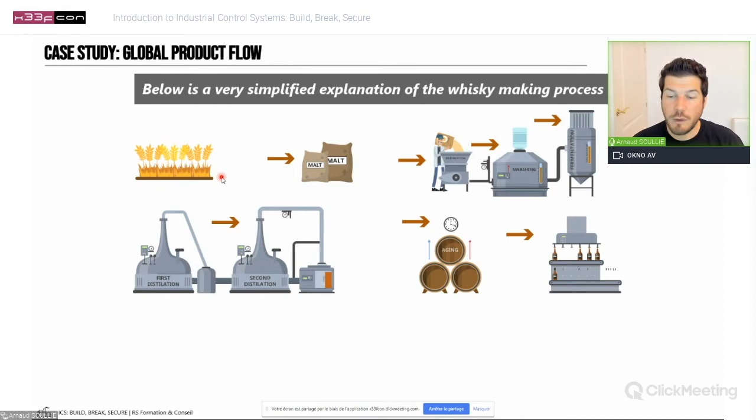Then you put that in some barrels for aging, and then you put that into bottles, ship to the customers, and everyone's happy. In our process, we will have a simplified version of the distillation, okay? Let me switch to my VM so I can show you what it looks like.

Okay, so now you should see my VM. I'm just going to close this small window here. So this is the training kit that I designed.

Actually, I want to show you maybe another slide before, just to make sure. Okay, it's this one. So I spent a lot of time trying to find a way to have a virtual training kit. So the way it works, everything is in the Windows 10 VM that I will provide. On this VM, I designed a specific application, HTML, JavaScript application, a Python application, and this will simulate the process of distillation.

So it will simulate the fact that if you turn the heater on, the temperature will rise, etc. This simulated process will discuss using Modbus with a PLC simulator. This PLC simulator is one provided by Schneider, so it's a real one, not a toy software.

And we also use Modbus to connect the PLC to a real Scada software. This Scada software is called IGSS, and it's also a commercial Scada software from Schneider, so there is a free version. So you will have your own little ICS with the physical process, the PLC, and the Scada. And of course, during the training, we'll use the Kali machine to use different tools to connect to this setup and try to hack it, okay?

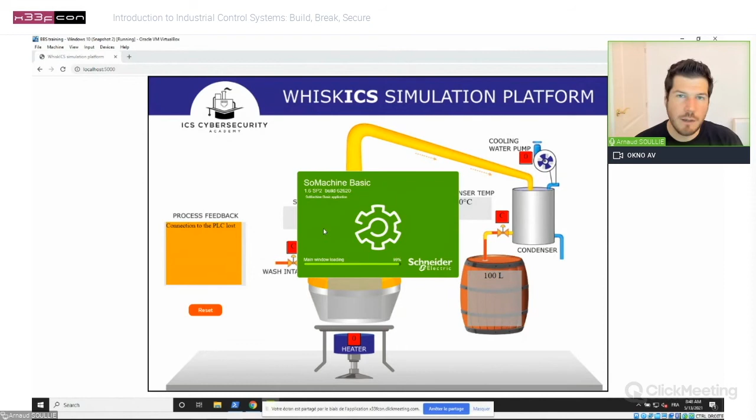Just so you know, here I prepared the program, but during the training, we develop the program together. So you learn how to use the specific programming languages for PLC. We learn how to use ladder logic, and we'll also learn how to use SFC, which is another type of programming language for PLC.

Okay, so let me open my project. Perfect. So here you can see that's the type of PLC I have. Here it is already programmed, so as you can see, that is ladder logic. So it's really different from C or from Python or Perl or any type of programming software. It's very graphical.

And now I will simply start my PLC by launching the simulator. Let's hope this works, because with this software, maybe 1 out of 2 times it crashes, but seems to work. Okay, perfect. And now I start the controller. Okay, let's go back here.

As you can see, now it's written distillation in progress, so it can connect to the PLC. And so let's just reset everything, all the values to 0. So what happens here? As you can see, this valve is open and the pot still is being filled. And we can watch it in real time if we go here in the program of the PLC.

So with this training kit, you can see exactly the code. As you can see, it's being filled, and here we can see that the valve is open. Now it's going to reach 2000 liters, and now the valve is closed. So if I go back here, I can see that my valve has been closed. So now the heater is on, and it's going to heat the liquid in order to distillate it.

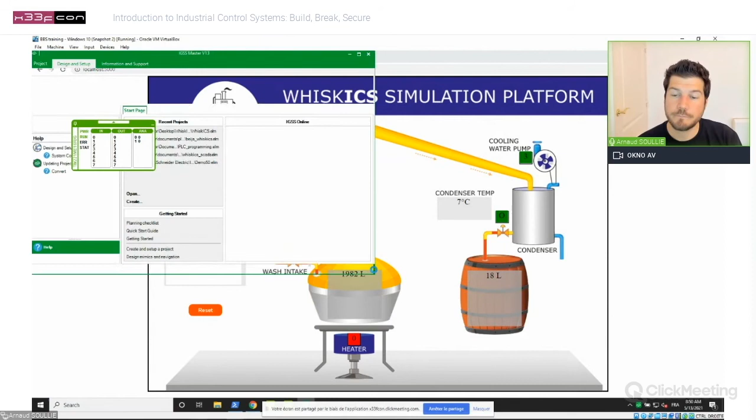So what I can do in addition to that, I can also connect my Scada software, IGSS. Let's launch that. Perfect.

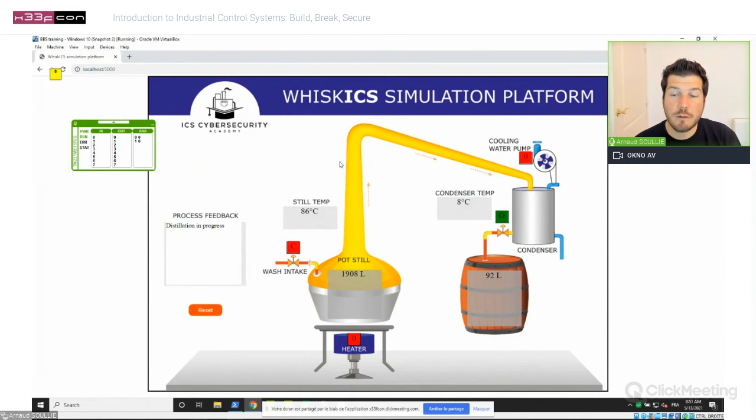And as you can see here on my Scada, I can see that the wash intake valve is closed because it's red, and I can see that the level of the still is 1934. Okay, so it's decreasing, but as you can see, I can monitor in real time my physical process using the Scada. And this is also something that we do together during the training.

So you have the right skills to modify the training kit as you want to be able to do your own research later. So I really think that's something really interesting about the training, is doing it yourself, learning how it works to be better at attacking it, but also at securing it.

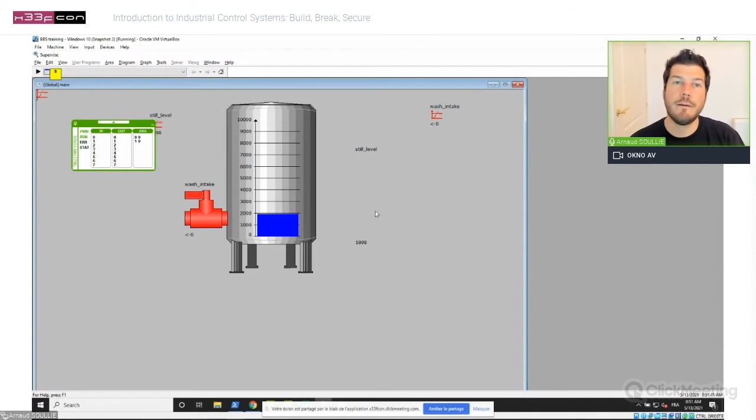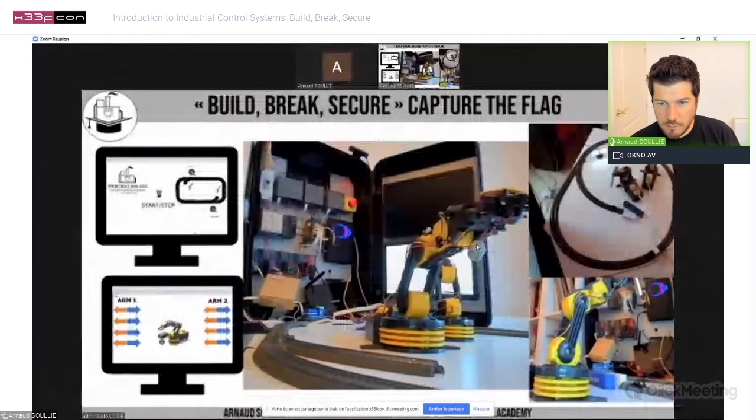So here I'm going to switch to another window, which is this one. I'm going to put that in full screen. I hope the quality is sufficient. Since you will be remotely and not near the process, I installed some setup with webcams so you can see what you're doing when you're performing attacks.

Let me just remove that. Okay, so as you can see here, on the top right, I have a small train circuit in my home with a train here and 2 robotic arms. The idea for this training would be to take control of the train and the robotic arms.

And on the left, you can see the screens for the Scada for the train and the Scada for the robot. So let me start the train. Okay, so let's start the train and let's see if you can see it on the video.

Okay, so here I'm stopping the train. As you can see, there's a SCADA that allows the operator to control it.

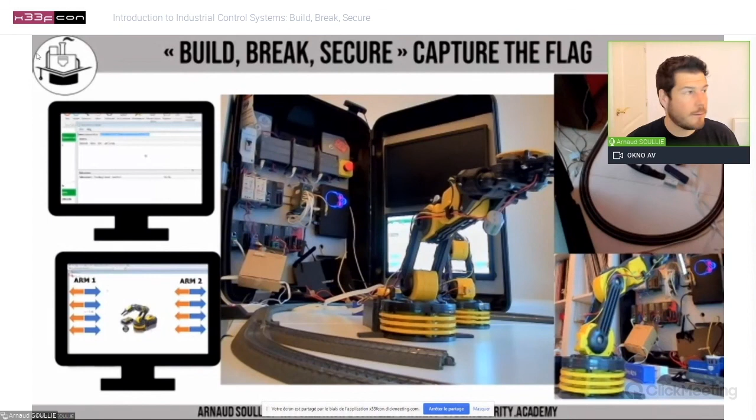Oh, it's now rebooting, too bad. Well, so you have this SCADA that allows you to control the train and also to control the rail switch to change on which track the train is running. And you also have another SCADA that allows you to control the robotic arms.

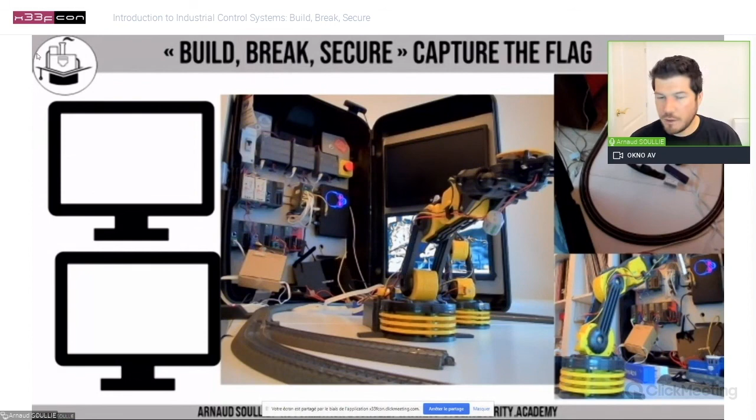Okay, so now I will quickly try to put the two things side by side. Let's see if my VM is coming up. It takes a few minutes—I think it doesn't like it when I change the resolution, but it should work.

Okay, here I am. So now I'm connected to the setup, and I also want to show you what you will do during the training. So let's say I want to scan the network, for example. I'm just going to do a quick scan—let's do a sudo nmap.

And maybe I'm just going to do, I think it's sP—I never know which one is lowercase, which one is uppercase. I want to do a ping scan on the range. Let's see how it works.